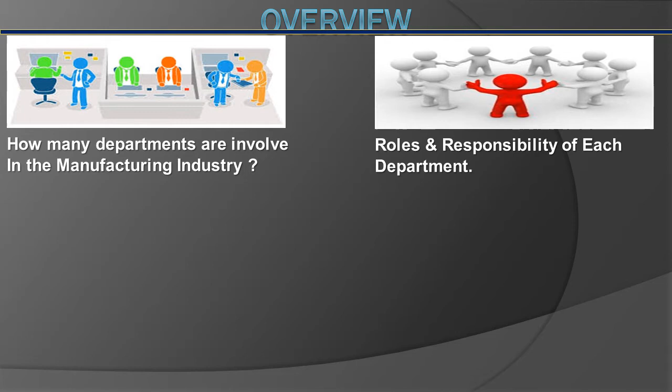And the second one is roles and responsibilities of each department. And the third one is how the technical data flows from one department to another department, and how ME plays a key role in the manufacturing industry. And the last one is what inputs are received by the manufacturing industry.

And frankly speaking, the manufacturing industry is such a vast field, it requires around 2 to 3 days to explain each and everything about it. But I try to cover the maximum possible information which I can deliver within 25 to 30 minutes, and which can give you a better understanding about the aerospace manufacturing industry.

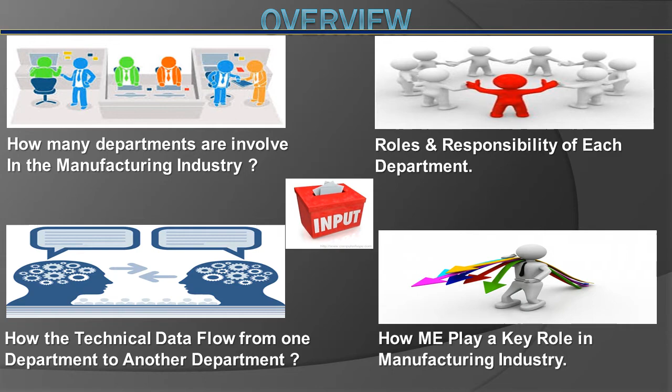Input. So at present, most of the OEM companies outsource their product for manufacturing to various suppliers, or we can say to various manufacturing industries. And here I am talking about OEM companies and manufacturing industry. So what is the difference in both? So OEM means original equipment manufacturer.

Companies like Boeing, Airbus, NAL, National Aerospace Laboratories. These companies come under OEM, original equipment manufacturers. So these companies do the R&D, research and development, and then they produce the aircraft.

But if you see in supplier categories or manufacturing categories, companies like Tata, DTL, Dynamatic, and Spirit Aerospace or Taneja, these companies come under manufacturing industries. These companies don't do any R&D type of work, they just manufacture the product as per the input given by OEM companies. So what inputs are provided by OEM companies to the manufacturing industry to manufacture the aircraft?

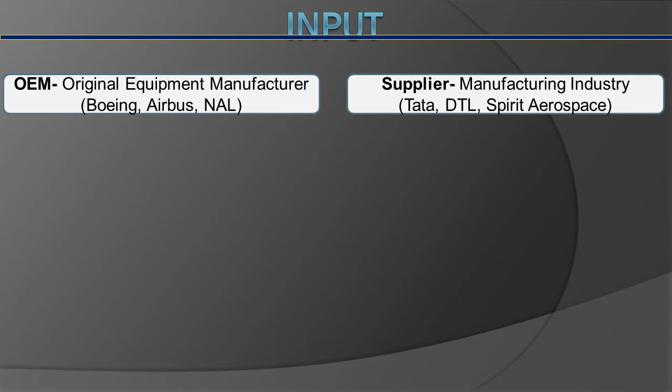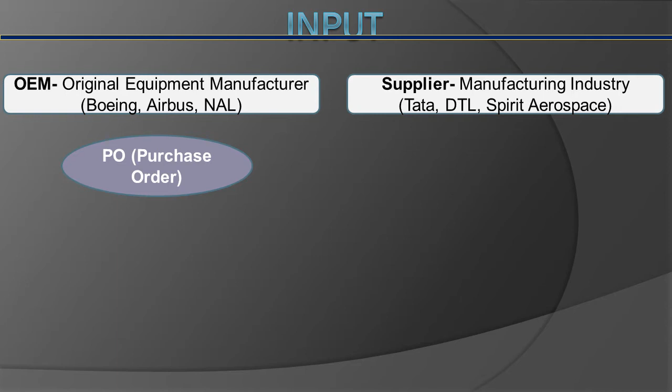So the first input is PO, purchase order. So the purchase order gives the information about how many aircraft need to be manufactured, and what is the duration of delivery. Duration of delivery means when the manufacturing industry needs to manufacture the particular aircraft and on which date we need to deliver it. And the third information the PO contains is cost per aircraft. What is the cost of the unit which the manufacturing industry is going to manufacture.

And the second document is SSOW. SSOW is a supplier statement of work. It gives the information about how an OEM company requires their aircraft from the manufacturer.

And the third one is TDP, EDP and PDP. So as I initially told, every company keeps their document nomenclature as per their standards, but the content and intent of the document are the same. So here also some companies call it technical data package, some call it engineering data package, and some call it product data package, but the content and intent of the document are the same.

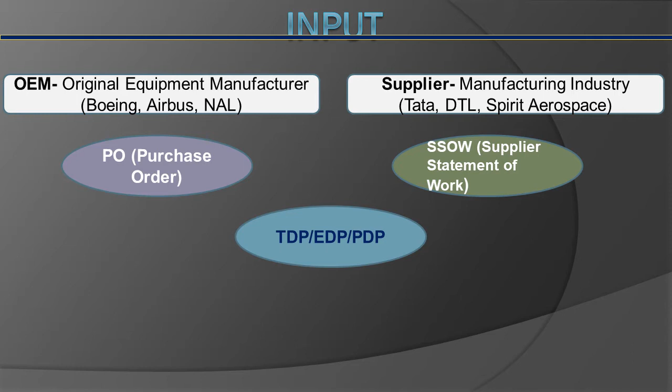So we will see what documents TDP contains. So TDP contains engineering drawing. As everyone knows, engineering drawing is a graphical language which is required to communicate the technical data from one engineer to another engineer, or from one person to another person.

And the second document TDP contains is EBOM, PL and material schedule. So some companies call it engineering bill of material, some call it PL, part list, and some call it material schedule, but the content and intent of the document are the same. So the engineering bill of material contains the material which is required to build the engineering.

And the third one is engineering specifications. So to maintain the product quality, engineering defines some set of requirements, limitations and qualifications. So those limitations, requirements and qualifications are listed according to the engineering specifications.

And these documents we are seeing in this slide are the basic documents which every OEM company gives to the manufacturing industry to manufacture the aircraft. Other than these, many more documents are there, which completely depend on what type of project is available with the manufacturing industry and what type of work they are going to do.

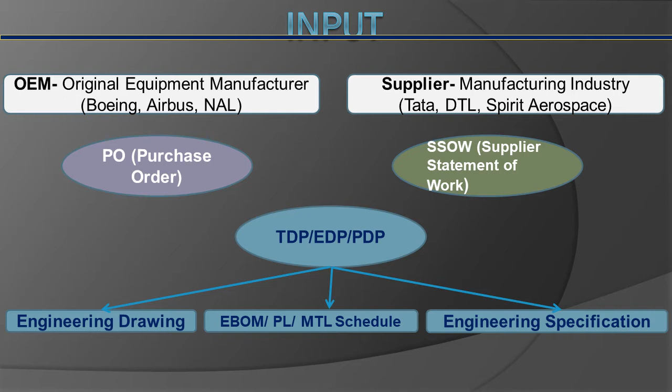Slide. CD, CM and CCD. So as every company keeps their document nomenclature as per their standards, or document nomenclature varies from company to company, similar to this, department names also vary from company to company, but the roles and responsibilities of the department are the same.

So here also some companies call it configuration department, CD, and CM is configuration management, and some companies call it CCD, configuration control department, but the roles and responsibilities of the department are the same. So the configuration department ensures that the aircraft which is going to be manufactured on the shop floor is as per the applicable engineering or applicable design.

The configuration department is the first department that receives input directly from the customer, verifies whether those inputs are as per the aircraft which we are going to manufacture, and then releases it to all the cross-functional departments. Under cross-functional departments come ME (manufacturing engineering), quality, tooling, IE (industrial engineering), PPC (production planning and control), SCM (supply chain management), estimation, and program management. These are the cross-functional departments.

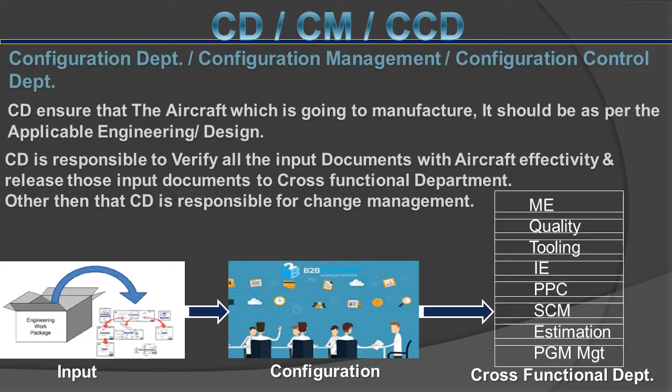So here, ME, methods and planning. Some companies call it the manufacturing engineering department, some call it the methods department, and some call it the planning department, but the roles and responsibilities of the department are the same. ME is responsible to translate the engineering drawing and technical information into a workable statement which can be understood by a layman or the shop floor mechanic. After the designing and until the product gets delivered to the customer, the manufacturing engineer is responsible for everything in the manufacturing industry.

On the basis of the inputs we have seen in slide number 3, the manufacturing engineer creates these many documents. Many more documents are there which are not listed here because there is no space in this slide. The manufacturing engineer creates all these documents listed here: build sequence. The second document is MBOM, manufacturing bill of material.

Under manufacturing bill of material come the hardware bill of material, consumable bill of material, procurement bill of material, make and buy list, facility plan, and then assembly operation sheet, visual aid, condition of supply, hand and cutting tools, tool orders, and PSD. PSD means production support document. Under production support document come documents like SIOS, supplementary instruction operation sheet, and ROS, rework operation sheet.

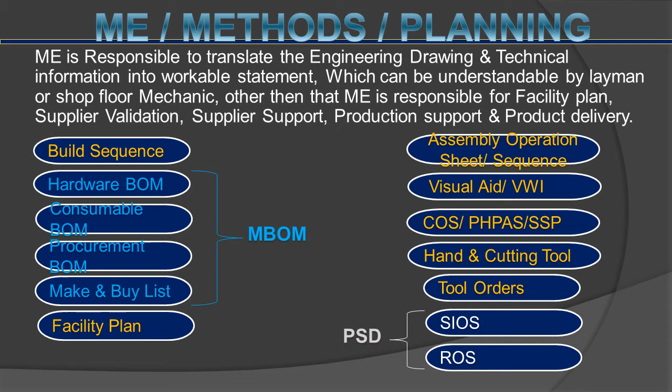Similar to this, we have ROS, Rework Operation Sheet. If a shop floor mechanic performs any operation which is not as per the manufacturing document or not meeting the engineering requirement, then to rectify these types of problems, the manufacturing engineer provides a solution in the form of ROS, repair rework operation sheet. Slide.

Basic manufacturing documents. As I told in the last slide, these are very important documents of the manufacturing industry. These four are those documents: build sequence, which some companies call build plan, AOS (assembly operation sheet), COS (condition of supply), and tool orders. These are the four basic documents which every manufacturing industry creates, and on the basis of these four documents, ME and other departments create many more documents. I'll be explaining all these documents one by one in detail.

The first one is build sequence. Some companies call it build sequence and some call it build plan, but the content and intent of the document are the same. Build sequence is a sequence of sub-assembly, assembly and major assembly to build the product. To prepare this document, ME breaks down the engineering assembly into various manufacturing assemblies as physically possible to build the product.

Here I have shown one example: this blue color one is the engineering assembly. When this engineering assembly comes to the manufacturer, XYZ Aero company, the manufacturing engineer divides this one blue engineering assembly into three red manufacturing assemblies: manufacturing assembly 1, 2, and 3. Like that, the manufacturing engineer breaks down one engineering assembly into various manufacturing assemblies to build the physical product.

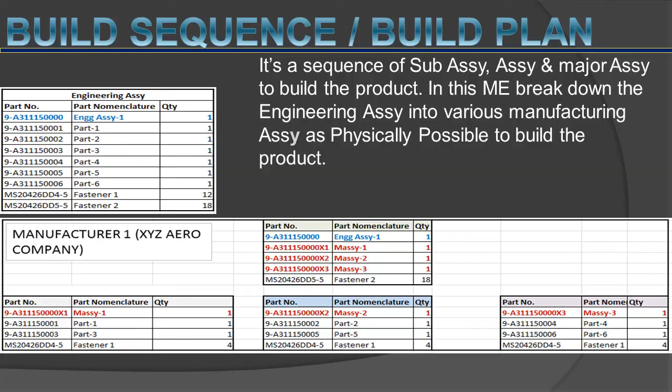Next, some companies call it assembly operation sheet, some companies call it manufacturing instruction sheet, and some companies call it PS, planning sheet, but the content and intent of the document are the same. So the assembly operation sheet is a sequence of operations to build a sub assembly, assembly or major assembly. And while ME prepares this operation sheet, he considers tool orders and condition of supply. I'll talk about these two documents in my coming slides.

Here we will see how this document gets flowed down to various departments and what roles and responsibilities other departments have with respect to this document. As we can see in green, once the AOS is complete, it goes to the quality department, and the quality department is responsible to verify all the documents created by the manufacturing engineering, methods or planning department. Other than this, quality is responsible to perform inspection of physical aircraft components on the shop floor.

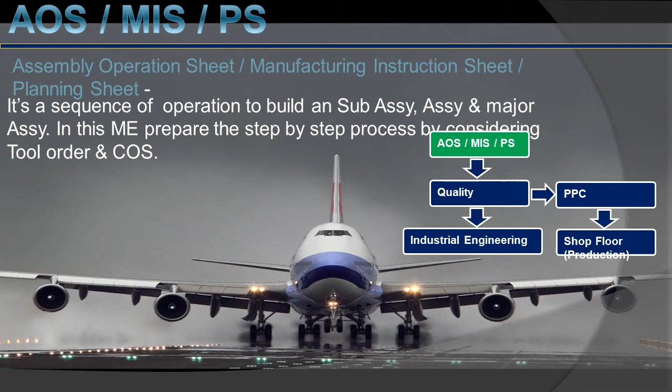Here also, some companies call it condition of supply, some call it perimeter hole pattern analysis sheet, and some call it SSP, supplier specific plan, but the content and intent are the same. Condition of supply tells the detail part manufacturer how assembly requires the detail part on the assembly shop floor. It contains: hole quantity, hole diameter, extra material, and cutout information. The last two are mainly for skins, because skins require an extra lug or extra material to locate onto the assembly jigs.

We will see how this condition of supply document flows down to various departments and the roles and responsibilities of each. Once the condition of supply is complete, it goes to quality for verification with respect to engineering, and then it goes to SCM, the supply chain management department. SCM is responsible to find suppliers who are eligible to manufacture the detail part.

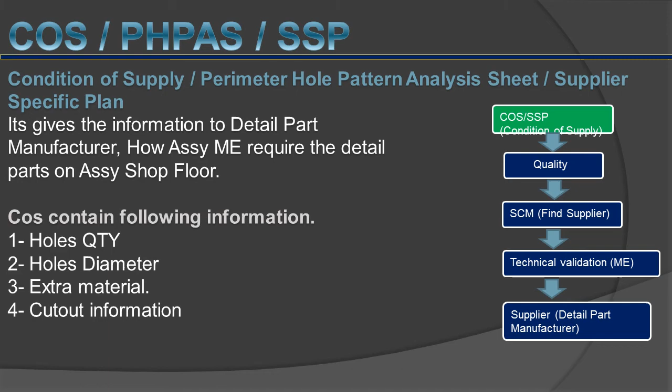Next slide: tool order. To build the product, ME requires tools, and the tool requirements are written in the tool order. ME creates four types of tool order: design tool order, fabrication tool order, scanning tool order, and refurbishment tool order. I'll explain them one by one.

Design tool order. ME creates design tool orders for NPD programs. NPD means new product development, a product not yet in the market, manufactured for the first time. First-time manufacturing requires tools, tools require tool design, and tool design requires the design tool order. So design tool orders are for NPD programs, but some OEMs or customers request the manufacturer to create design tool orders for old products also.

So in that case ME creates a design tool order for old products also. And the second one is the fabrication tool order. So once the design gets ready, to manufacture or fabricate the tool, the manufacturing engineer releases a fabrication tool order to the tooling department.